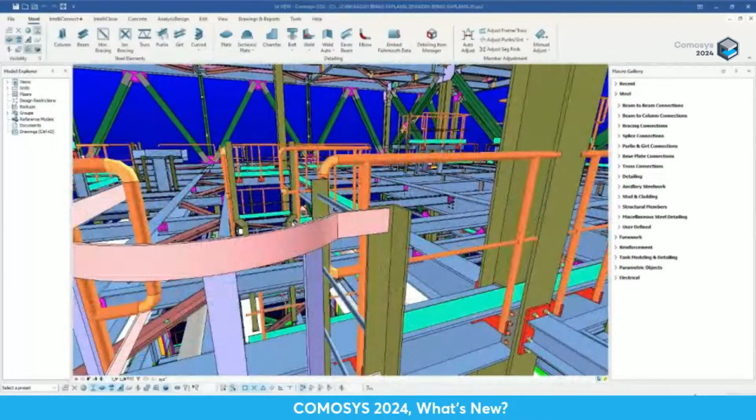All countries are different, design preferences within countries are different—in short, almost everyone does things their own unique way. In this regard, we have initiated a major push towards complete customizability. Comosys, as you know, is already very customizable, but we want to take it to its logical end. In this webinar, I'll show you many new features in this regard, and of course there'll be many other features as well. We have improvements all over.

We have improvements on the steel modeling side, improvements on the concrete modeling side, and we also have the seeds of precast concrete to share with you. There are many improvements on the drawing side as well, and then there are some general improvements. All in all, this is a major release, and we're sure you'll enjoy today's presentation. Now, without further ado, I'd like to start the presentation.

Now, the first thing I want to talk about is what we call user-defined attributes. You see them under the Edit menu—on the right-hand side there's a little button called UDA, which stands for User-Defined Attributes. I'll explain what they are.

Imagine any object—a frame, a profile, a plate, a bolt, basically anything. Out of the box, off the shelf, when you buy Comosys there are many attributes. When you double-click on a profile, for example, it has many attributes built in—the profile name, the material, the profile type, or other things like detailing-related or numbering-related information, or design-related information. All these are obviously off-the-shelf attributes given with the program.

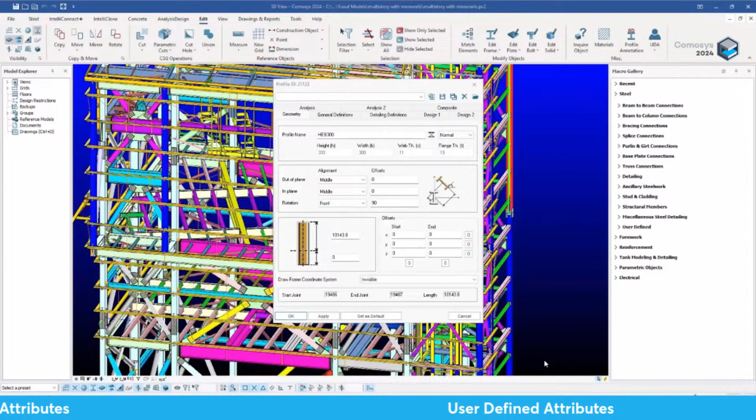Let's press this button over here. Like I said, it's under the edit menu. And when I press this button, this dialog box opens up. I want to go through this dialog box slowly so you can understand how UDAs are used.

Now the first thing I want to talk about is the different types of attributes you might need—this is the type variable. If I open it, you see it can be a text or a text list, an integer or an integer list, a numeric value or a numeric value list, or a Boolean, which means a true-false type of attribute.

Now what does it mean? A text basically means maybe it's somebody's name, or the name of a company or vendor. Whenever you're going to write it down using text, that's a text field. So the type of the attribute is a text type.

But it could also be a text list, which means you want to limit the input to only particular texts. Let's say you have 5 vendors working on the project with specific names—company ABC, company DEF, and so on. You don't want to leave those names open, because with many users working on the model, each might make spelling mistakes or enter the name differently in different places. So you want to limit their choices to only select from a list of 5 given companies—in that case it will be a text list rather than an open text field.

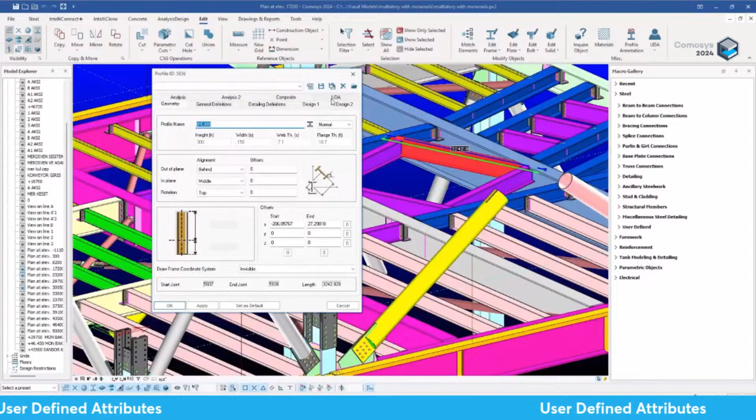But now you'll see this tab called the UDA tab, which means there are user-defined attributes related to this object. When I go inside, I see there's only one caption called finish—we could have multiple depending on how many group types we define. Here we've only defined one caption, finish, and under that caption only one variable called surface finish.

We could have multiple variables under the finish caption—10 different variables in whatever order we wanted. Inside surface finish, we've given it the option of either normal paint or fire resistant paint. So I could choose fire resistant paint for this one and say OK.

Now let's select this one, and this one, and this one—the remaining three—and give these the fire resistant paint option as well. On this floor, in this building, the others have nothing. If I double click on any other one, it has the ability to assign a surface finish, which wasn't available off the shelf, but nothing has been assigned.

Whereas this particular beam, if we go inside, says we need fire resistant paint. Now, just to show you this isn't limited to one UDA, I've quickly assigned several. I've assigned two UDAs under the finish caption—one was the surface finish like we did together, and I've added another called sandblasting type. I've also defined a new group caption called erection contractor, with a contractor's name UDA, just to show you what this looks like.

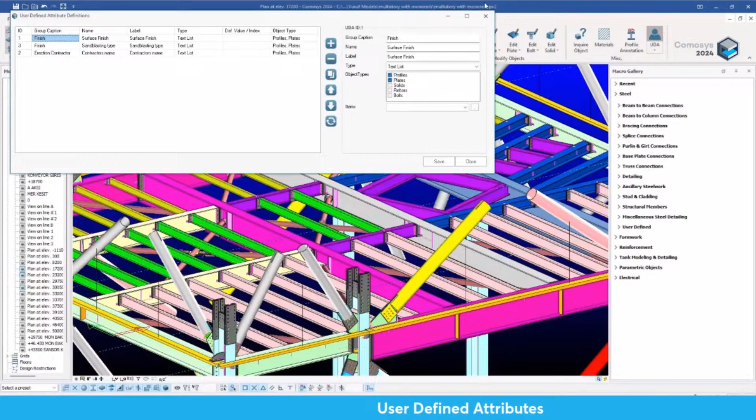If I double click on this beam now, you'll see we have two tabs: one is the erection contractor tab, which wasn't there before because I hadn't added it, and the finish tab, which now has two user-defined attributes under it.

Like I said, you can have as many as you want. You can have 10 different variables, 10 different tabs towards the side, as many as your project basically requires. And you can then use them in different parts of the software.

Now, obviously, you can tell that these user-defined attributes are extremely important. They give you a lot of customizability and flexibility with your project. It gives you the ability to really deal with large-scale projects with very varied amounts or types of data, and I've shown you how you can create as many user-defined attributes as you want.

And now, obviously, once we've created them, defined them, and assigned them to the variable, to the different objects, you can assign them to your profiles, your plates, your generic solids, your bolts, or basically any object type which you have.

And once you've assigned them, you want to obviously use these user-defined attributes. There are three main areas where you will use them. The first one, and the most obvious one, is that you use them for normal model side or drawing side filtering. Filtering is extremely important with large projects.

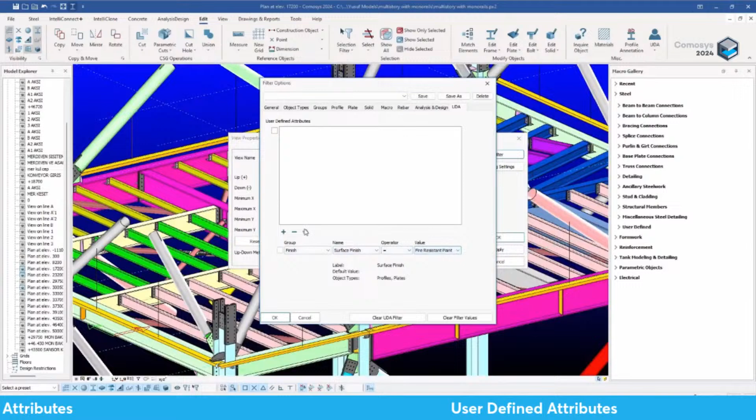Once I've created this filter, let me press this plus button, and I can add it to the top. Whatever I add to the top, those will be the filters which I can then use for my filtering.

Let me create another one, using the erection contractor, the other one I created which I didn't show you, but I've assigned it to certain beams—the contractor's name responsible for the erection of certain beams on the site. We can say equal, and let's call it Steel Smart.

There are three contractors working on the erection of this building, and I've selected certain beams and assigned them to this particular contractor. Let me assign that as well.

Now I've got two filters up there, but I don't want to use both. I just want to see—if I select this one, it means I want to see which ones have the fire resisting paint. If I don't select it, it's not in play; only the selected one is in play. When I press OK and OK, immediately only the beams which have fire resistant paint are left on the screen.

Similarly, if I go back and change this from this to this, now I have the other one in play, and I see these are the beams which will be erected by the contractor called Steel Smart. So this is a very handy and the most obvious way of using the user-defined attributes.

Like I said, there are two other places where we can use them, and I'll just mention them at this point because I'll be talking about them in detail when we get to those topics. The first one is in custom tables.

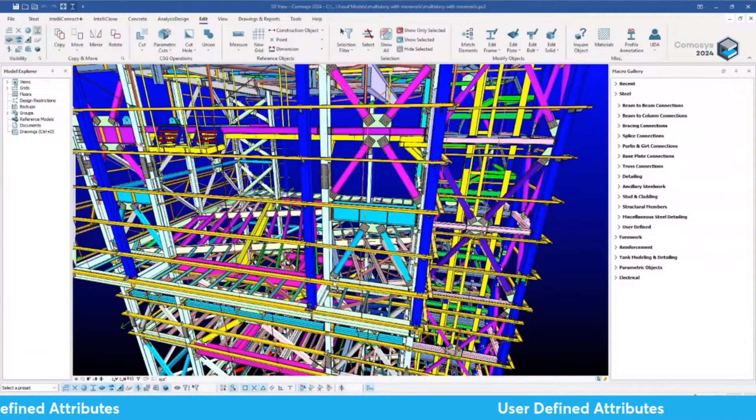And if you do that, then any new model which you create will automatically have these user-defined attributes. So you won't need to redefine them every time you create a new model. So any user-defined attributes which you feel that you will be using again and again in all your projects, you can simply store them away in the company settings folder.

Otherwise, if they're not going to be used every time, then what you can do is you can store them away in the model folder, in which case only that particular model will have it. And if you have these XML files in both the company folder as well as the model folder, then Comosys will just merge those XML files together and take the user-defined attributes from both files, giving you a consolidated set which can then be used in that particular model.

But with this version, what we have implemented is something we call reference models. And reference models can make your work a lot easier in certain ways. What they can do is they can provide you with certain capabilities, which I will talk about. Now, before we start into all that, I would just like to say...

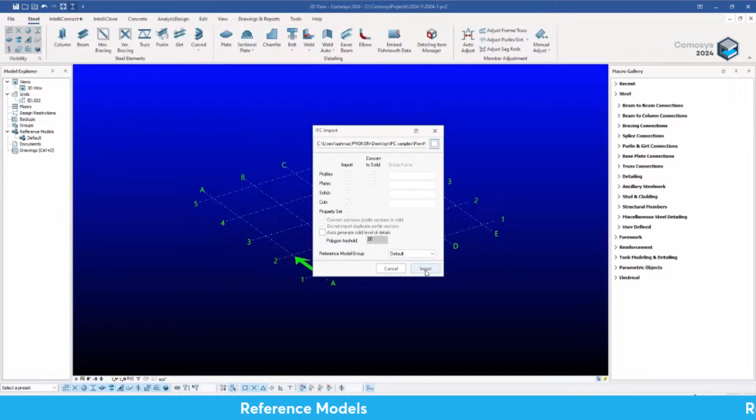Let me click on these three dots and go to wherever we have the IFC file. Let's say we have an IFC file we want to import as a reference model this time. We click on it, say open, and we can change the settings. I'm not going to go into those details since that's not the purpose of this presentation. I just say import, and it starts importing that particular IFC file as a reference model.

Now you may be thinking, what's the difference between importing it as a normal IFC file and importing it as a reference model? There are a few differences which make working with reference models a lot easier in certain ways. To begin with, if it was a normal IFC import, I could have deleted any object.

But in this case, if I select this object and press delete, it's not going to delete it, because it's either one, all, or nothing. The entire reference model needs to be acted upon by the user, and only things you want to do with the entire model are possible.

So what are those things which are possible? If I open this now, you see we have this reference model listed under the default group. If I double click on that, you see it's an IFC file. It tells you where the IFC file resides, under which group (the default group), and it has a name. You can add some descriptions, stages, and sources, some extra information if you want.

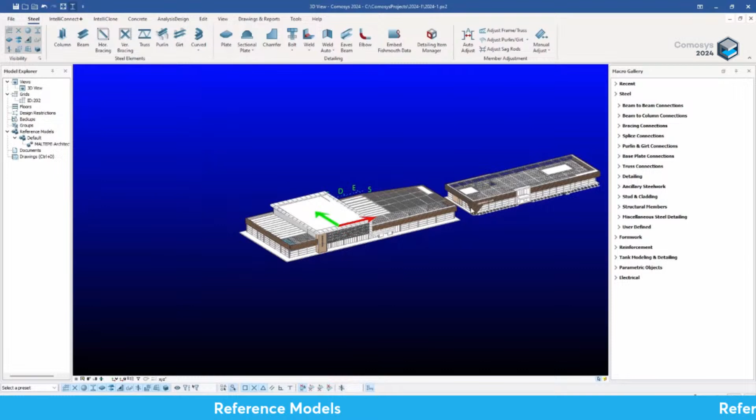What's important is that you can give it an offset. For example, if I give it an offset of 30,000 in the X direction, the entire IFC file gets shifted by 30,000 in the X direction. That isn't possible after importing from a normal IFC, because that's a one-time import, and once it's imported, it's done. But here, as you can see, you can give an offset to the origin.

What you can also do is give a scale factor. For example, if you imported by mistake using the wrong units — it was supposed to be millimeters but you imported it in centimeters — you can now change the scale as well as the rotation, even after importing. It also gives you information on when the file was last imported, so if the IFC file changes in the folder where it resides, you can re-import it from there.

Now you have something called custom draw type and custom color. By default it uses the system default, but you can convert it into wireframe if you want, in which case this particular model will always be drawn in wireframe, no matter what the rest of Comosys's drawing settings are. As you can see, everything there is now drawn in wireframe.

What else can we do? We can change that to anything, like I said. You can also change the custom color, meaning you tell the system to override the color the IFC file provided and turn it into something else — gray, for example, if it was a reference structure nearby your structure. That's something you'd be able to do.

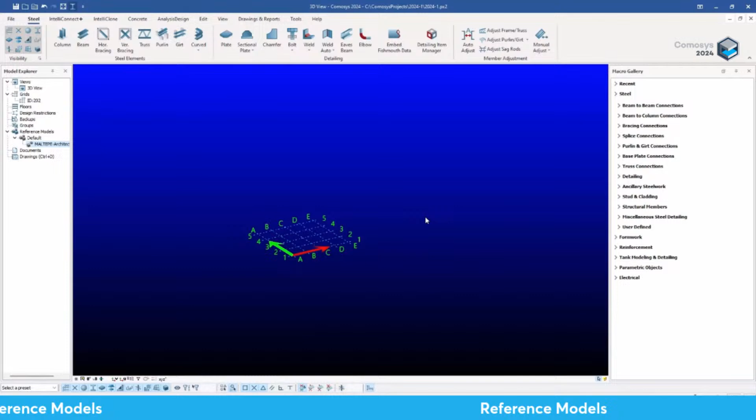Had it been a normal IFC import, you would then need to continuously manage it by selection and all that. But in this case, you can just right click again and say show, and the group and the entire reference model is shown on the screen once more. So this is the basic advantage which we have.

Once we have the entire reference model automatically saved under a group, we can show it, hide it, or even update it if the source file changes, and bring it back in. We can delete it, remove it from our list of models, and re-import it later. As long as we don't delete it, we can have as many models as we want under the reference model tab, and manage those models by right clicking them to show, hide, or update them as needed.

Not in this version, but very soon we will be having change management implemented into this as well, which means that when you update a model, when the source file changes, it will show you which particular objects have changed from the last import, which ones were added, which ones are deleted, which ones have been modified, etc. So the entire change management system which exists in Comosys will be implemented to this particular feature as well.

It's impossible to show deleted items, because if you delete them, there's nothing left to see. So it will temporarily show you those items, indicating that these items have been deleted since the last import. In the previous import they existed, but not in this one. But it'll also give you the option of deleting them once you've seen them.

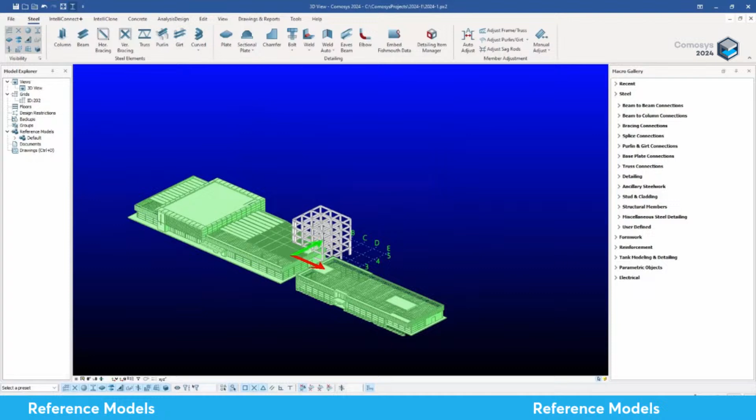It's wherever it is in the current units. If we go and double click over here, we now see that we have two models over there, the earlier one and this new one. We can double click on this one. We can give it a Y offset of 10 meters if we want, for example, maybe the origin has not been brought in properly. What we can also do, like I mentioned, is give it a rotation of, say, 35 degrees.

And in this way we can continue importing in our reference models, and we will keep collecting them on the left hand side. You can have 10, 12 different models.

Now obviously when you have these reference models, then you can work with them. They're all snappable points. So for example, if I were to enter a beam, I can snap from this point to this point, and my beam will be created. I can snap from that point to that point, and my beam will be created. So these reference models can now be used to create real native Comosys objects, and then we can work with them.

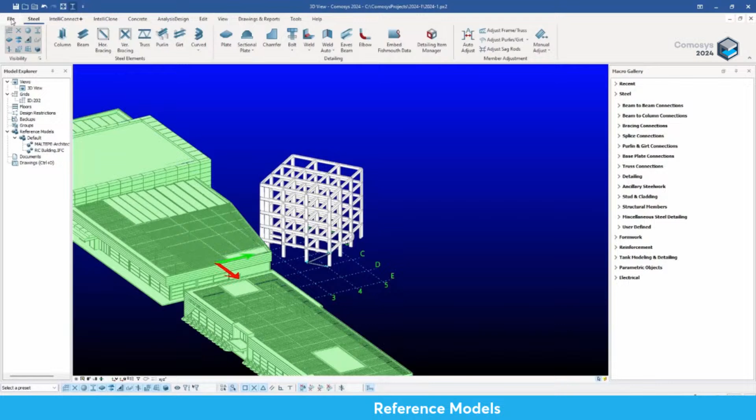But the whole idea is that if we had imported them through the normal IFC import, not only would they have automatically been converted to local native objects, which we might not have wanted, but also each one of those objects would need to be handled separately, because they wouldn't behave as a group. Whereas now, in this case, we can just turn this one off, leave this one on, or turn this one back on and turn the other one off. So it makes the whole business of dealing or working with reference models a lot easier than the normal IFC import would have done. So we hope you like this feature.

It's very useful. What we can also do is, as I had mentioned at the beginning, we can also import DXF models. Obviously, that's not going to be used a lot, but you can do that. And the one advantage you will have over there is that if you import a DXF model, then any layers you have in the original DXF file will be available for showing and hiding once they have been imported inside Comosys.

One small thing I want to mention is the improvements in the filters. Previously, some filters related to plates were not part of the filter option, but that capability was accessed from other parts of Comosys.

But now we have included under the standard filter the ability to filter according to the material of the plate, according to part and assembly position numbers, prefixes, actual numbers, etc., and also the ability to filter according to the thicknesses of plates. These were not part of the standard filter previously, so they couldn't be used in drawings, or it was difficult to use them even on the modeling side. But now we have them. For example, this building is mostly 355, S355, the plate material.

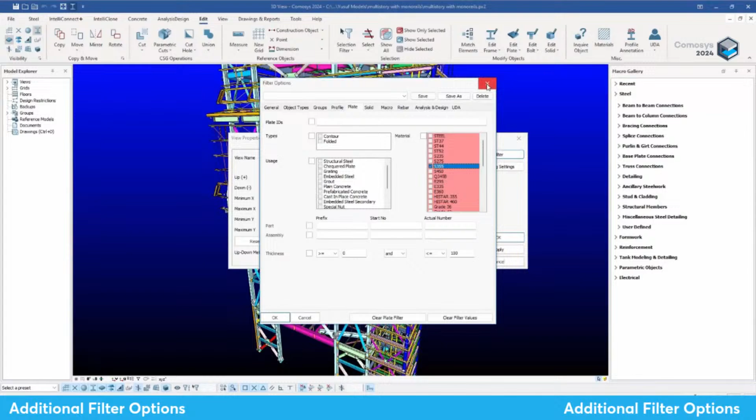Let me remove all the profiles, so now we're only seeing the plates. And let me go into the filter and select the 355 plates. If I just select that and say OK.

This building mostly uses this material, but if I want to see if I missed any, I can use the 'not' option, which means show me any plates which are not 355. If I do that, certain plates come up, and I can double click on them and see that the material has been set to some other material by mistake, and I can either make the necessary changes or leave it.

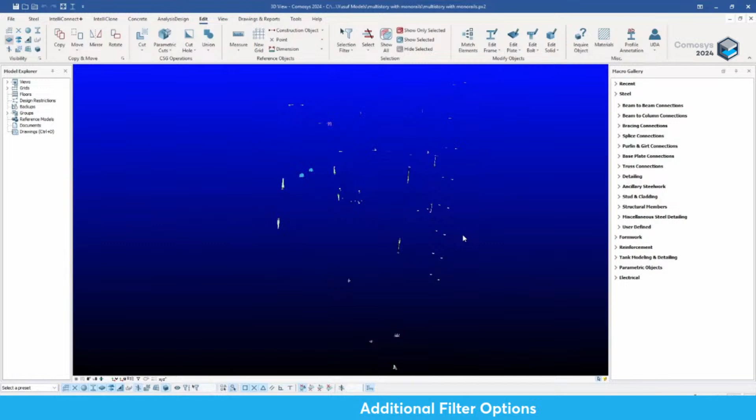Similarly, you can also filter under the plates section. Let me remove this filter, and now I want to show you this thickness related filter. You can filter according to the thicknesses, so you can say show me the plates which have a thickness greater than 5 millimeters, and you can put an 'and' or 'or' between them, and less than or equal to 10, for example. So you have these operators, equal to, not equal to, less than, and you can use all of them in combination with the first and second parameter.

So now it's going to show me only the plates which are between 5 and 10 in thickness, in millimeters. If I say OK, it filters out those plates, and I can zoom in and double click on any plate and see that the thickness is actually, for example, 10 in this case. This one is 10 as well. Maybe this one is 10 as well.

But if I go into the filter and change it to 'not', which means show me the plates other than these, either less than 5 or greater than 10, then I get these other plates. For example, this one is 20 millimeters. So this is a very quick way of using the filter command, where previously we didn't have these options of filtering the plates in this way, and I think they're very useful for somebody who's modeling.

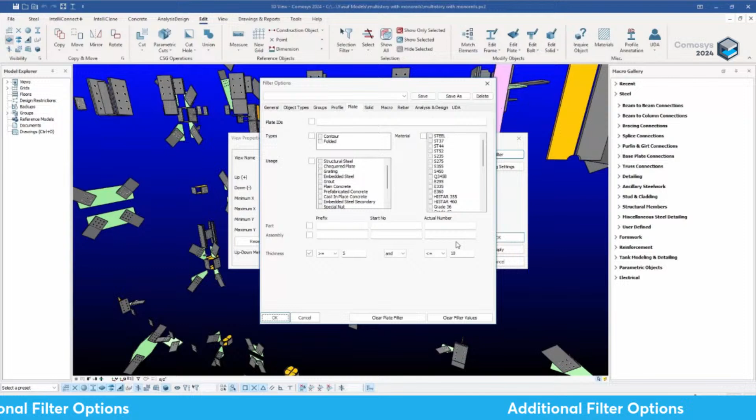Next, I want to talk about the on-screen editing handles. As you know, Comosys has very powerful features for modeling, and one of them is on-screen editing. Up till this version, we had on-screen editing mainly for the plate object and the rebar object, and they were both very advanced. You could pick the handles, give chamfers, move them, delete the chamfers, move them to a surface. There are very nice examples of how these are extremely useful.

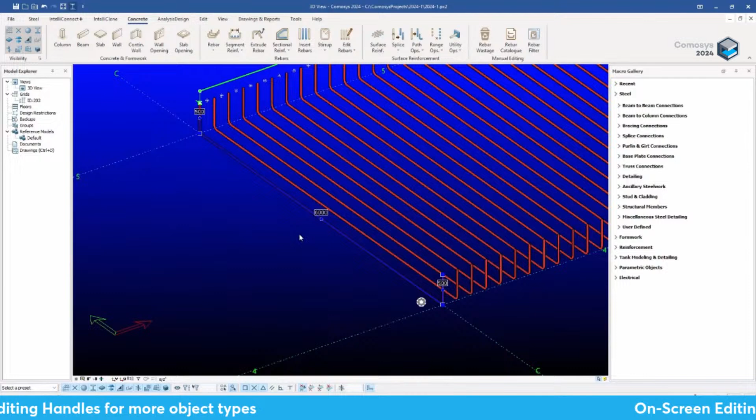Similarly, for the rebar, you could move the range, limit the range, make it from linear to trapezoidal to circular. You could insert points in between, move the points of the rebar definition, etc. These are very useful as on-screen editing handles. But what we didn't have was, for example, for frames. So in this version, we have introduced on-screen editing handles for profiles as well, so just like for the other objects, we would just select the object and the on-screen editing handles would appear.

Similarly, in this one as well, when we select the frame object, it immediately shows you the length of the object on the screen. Secondly, it gives you two handles, one at the start and one at the end. You can just select that handle, and when you do that, you can give it a direct move. So I can just say move it 500, for example, something like this.

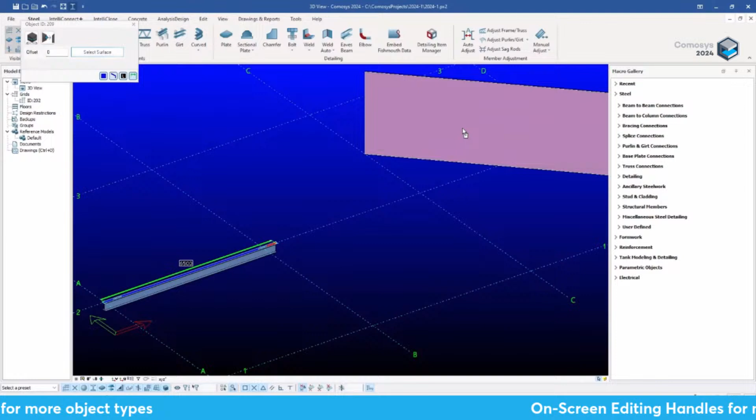Or, for instance, I could once again select the handle over there. Instead of giving it a normal move where I have to enter coordinates or distances, I can say move the definition point to a surface. Press this button, and I can even give it an offset. Let's keep it 0 at the moment, but it's asking me to select a surface. When I do that, I can select a surface on the screen, and then this point is taken perpendicular to that surface, basically a perpendicular extension of that point to the surface.

You can always turn these handles on and off if you don't want to see them. For example, right now, if I select any object, the handles are turned on. But if I click on this button over here and toggle it, the handles are not shown. So if you don't want to see them all the time and only want to see them when you're using them, you can turn them off, and if you turn them on, they will appear on the screen.

Another object which previously did not have on-screen editing handles is the folded plate. Previously, if we needed to modify or give chamfers to the folded plate, we needed to double-click on the object, go to the chamfer tab, and remember which point. For example, when creating this plate, if this was the first point, the second, the third, and the fourth, we needed to remember that to give a chamfer to this one, it's the second point. So we would need to enter 2, meaning the second point, and then give the chamfer parameters, something like this, and then we would get our desired chamfer.

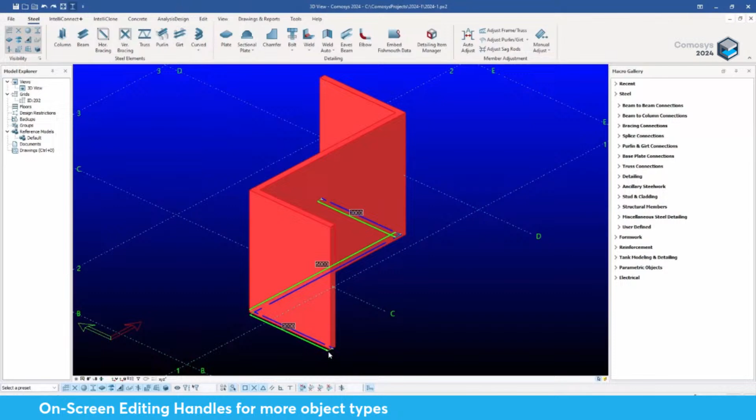Now, in this version, we have given direct on-screen editing, so you see the handles appear now, which previously did not. You can just go and select that chamfer for the second point and say I want to give this a chamfer, this type, and just give those parameters. So you don't need to remember which point was which, which previously made it a bit difficult. You can just go like that. Similarly, you can select the other chamfer, enter that, and give it another chamfer variable, for example. It's much easier like this on the screen.

Let's just undo that. Similarly, you can select those chamfer points and move them directly, in the X direction, the Y direction, or the Z direction. Or if you wanted to, you could select a surface on the screen for those points, just like I showed you for the frame element as well. This is a very useful feature where you can extend that point to another surface, which you can select on the screen.

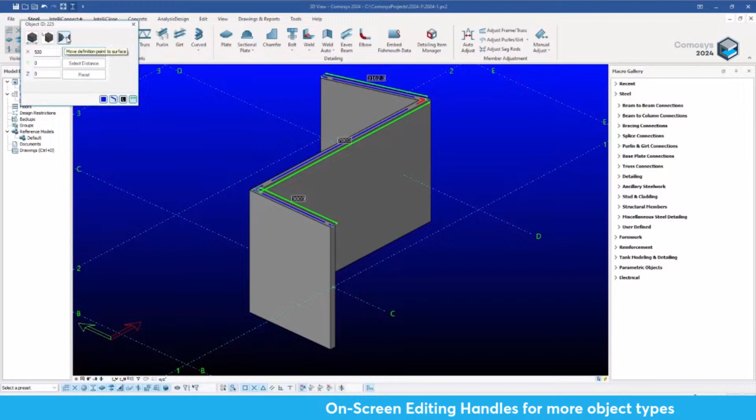Now, similar to the frame and the folded plate which we just talked about, some of the parametric cut objects, which are very useful in modeling, have also been given handles or on-screen editing capabilities. For example, the box cut has been given this capability in addition to the tapered cut as well. These can be very useful if you want to create a parametric cut and then later move it around using the handle.

So, for instance, let's use the box cut. It asks for a surface. Let me select the top surface of this beam. Then it asks for an origin point, so let me give it this one and just right click. I just want to create a simple cut so you can see it on the screen, and I'll get out of the command.

Now that I've created it, as you can see, this cut itself has got certain handles on the screen. So, for example, if I select this one, I can move it around by saying I want to give it an extension of about 50, and it's going to move it in that direction, 50 millimeters, the length like that.

Similarly, this direction also can be modified using these handles which I've just shown you.

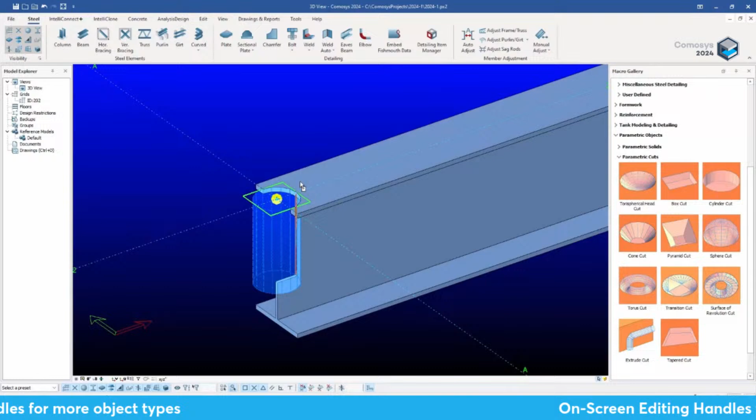Similarly, if I was to use the cylindrical cut as a parametric cut, I can once again show the top surface and then show a point and just create a default cylindrical cut. And then if I select the cut itself, you can see I have these handles for adjusting the length and the radius of the cut.

For example, if I choose this handle, I can modify the radius of the cut by moving it 50 millimeters in that direction. Similarly, I could choose this handle and increase the length of the cylindrical cut. So it's very easy to use these parametric cuts and then use the handles for on-screen editing.

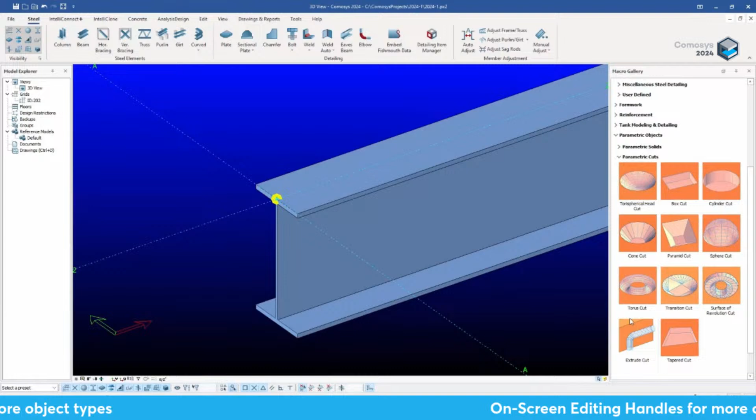Another very important parametric cut, which can be used for on-screen editing, is the tapered cut. Let me try and use that. So let me select this side, the side of the flange, and then I can create that cut over here.

If I use this point, I give it a DX of 500. That's quite far, but anyway. Then I can stick at this point and say something else, at 500, comma 0, comma minus 200 or something like that. And then I can stick at this point and say DZ minus 200.

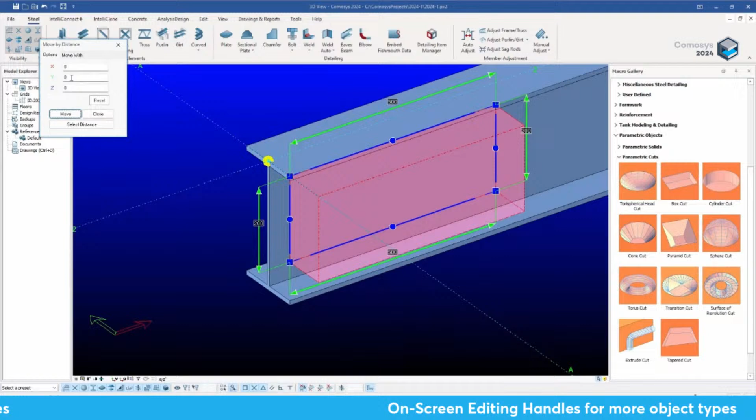So this feature is very useful. I can now select the last point again, and it asks about creating holes inside this cut, which I don't want, so I'll just right click, and it creates that cut immediately over here. Obviously it's not penetrating the object at the moment, so I need to move it a bit. I can move it linearly in the Y direction, say 100 millimeters, and now it's cutting the object.

But it's like a polygon cut - you can use as many points as you want. The definition points which I use to create this polygon cut are available as handles, and I can even insert new points in this cut, just like you can insert new points in plates.

So if I select this point, for example, I can give it a chamfer of this type with a radius of, say, 20, and say apply. Immediately I get a little chamfer over there. So just like I showed you, by selecting this tapered cut, you could give chamfers to points.

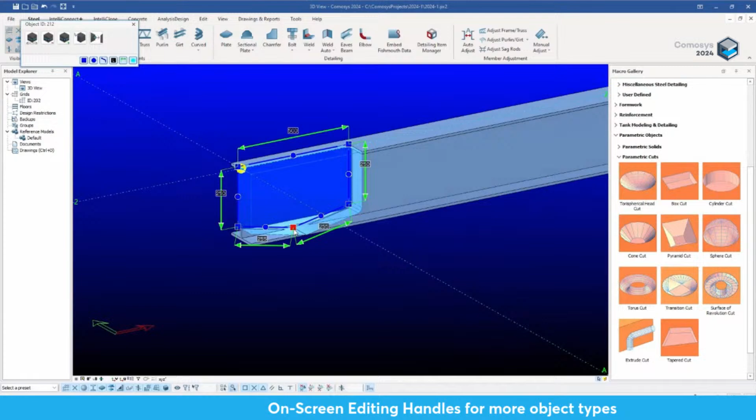You could also move the entire definition lines. So I can take this entire line, for example, and move it downwards by 50 millimeters. Or I could select this point only - this point doesn't exist, it's the midpoint - and I can create a new definition point by adding a new vertex to this cut. Imagine I've modified the whole definition of the cut on screen, and let me move that a bit more. Now it's a new point, so it's a lot easier.

I can do that, and if I remove the cuts from the screen, you can see how I have cut my object. This is extremely useful because after creating the cut through the tapered cut command, you still have the definition points and the handles on the screen. You can give chamfers to the corners, insert new points in the cut, and move entire lines.

So this line, for example, if you wanted to move it to the right, all you needed to do was reset this and say move it 100 in the X direction, and it will go 100 in the X direction. So this is very useful. This on-screen editing for cuts, the availability of on-screen editing for cuts as well, will really make the job of the detailer a lot easier, we believe.

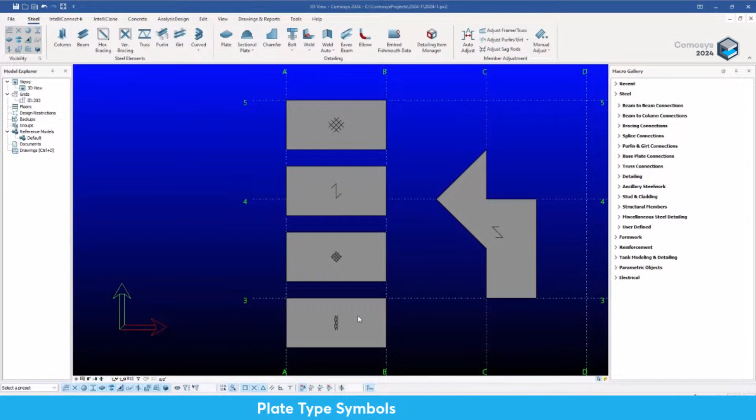Now let's talk about gratings and checkered plates. Previously in Comosys, we could model gratings and checkered plates, but there was no way of distinguishing between them easily visually on the modeling side. On the drawing side, we would have these symbols to represent them, and from these symbols we could tell. But on the modeling side, we did not have these symbols, so it was difficult to tell what we had modeled unless we double-clicked and checked the usage.

But in this new version, what we have done is we have created this ability to create these symbols. So for example, this is a checkered plate. And now we have the ability, the moment we select the checkered plate, it automatically draws the symbol of the checkered plate on the model.

Now, what it can also do is you can decide whether you want to see that symbol or not. So if you remove this tick, then the symbol also disappears. But if you put it back, then like I said, you have the option of seeing it.

Now, another option which you have is you can give certain offsets. So for example, if I were to give an X offset of 1500 millimeters, I can shift that symbol a bit to the left or the right or the top in whichever X or Y direction I want. The reason why we do so, it's not that important on the modeling side, but wherever we place this symbol on the modeling side, it's going to appear at the same spot in the drawings as well. So the user now has much more control over how the symbol will appear and where it will appear.

So let me bring that back, or we can even give it a rotation if you want. Let me bring it back to the original one. This is the grating symbol, as you know, and this has also been now provided for the modeling side as well. Once again, we have whether we want to draw the symbol or not, but we can also choose whether we want to place it in the short direction or in the long direction. So if we want on the modeling side, we can show the direction in which the grating will be designed. So the user now has more control over this grating symbol, which can then pass on this information to the fabricator as well.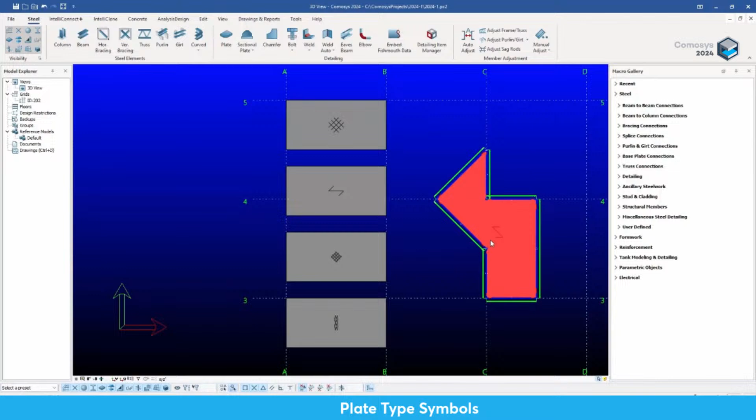And not only that, as you can see over here, sometimes we have a very weird piece of grating and we want a particular direction. So then we can use the rotation angle to exactly define what the direction of the spanning beams of the grating would be.

Similarly, we have these two new options. We did not have them at all. This is the diamond plate in the usage - it's all being done from the usage, by the way. The diamond plate option has been added, this wasn't there previously. And when we choose that, then we get this symbol by default. And similarly, this fourth one has been added, which is for expanded metals, expanded sheet - this one gives us this particular symbol. Now, these symbols are the most commonly used symbols globally.

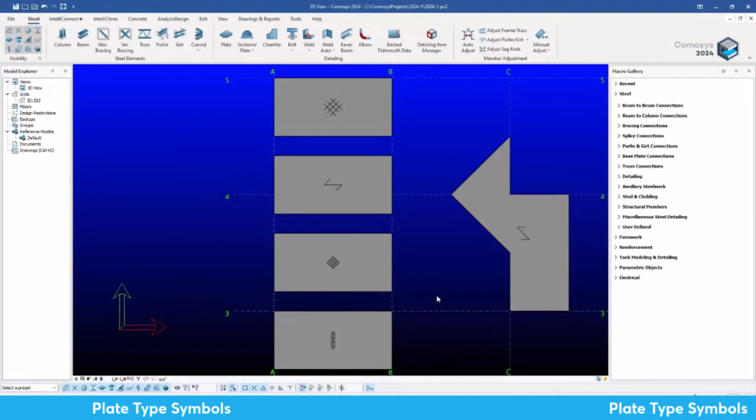But if you want, you can customize them. We will be talking about something called the symbol editor in this webinar later on, and in the symbol editor, we will show you how you can actually create your own symbols. And if you do that, then you can actually link those symbols to these plates as well.

And how you do that, I won't be showing that at the moment, but you basically go to project preferences. And if you go to the symbols over here, it shows that for the checkered plate and for the grating and for expanded plate and for the diamond plates, you can assign 4 different symbols from a particular symbols file. I mean, we haven't talked about this, so I don't expect you to understand how the details work. But basically, you will create your own 4 symbols, you can assign those indices, and then whatever symbols you use in your country, those symbols will appear on the modeling side.

And of course, the same is true for the drawing side as well. When you decide on these symbols, when they go to the drawings, then on the drawings also you will get to see the same symbol. So this is a very important improvement which was lacking in Comosys - this ability to customize all these symbols for grating and checkered plate and adding your own symbols, etc. And this is something which we have added to the new version.

Now, the next thing I want to talk about is once again related to what I said in the beginning, that we are pushing for better features when it comes to customizability. One of such features is the ability to create arbitrary symbols of any sort, like the ones you see on the screen right now, and then use these symbols anywhere in the drawings, either directly or as part of some text, or even as part of customizable annotations.

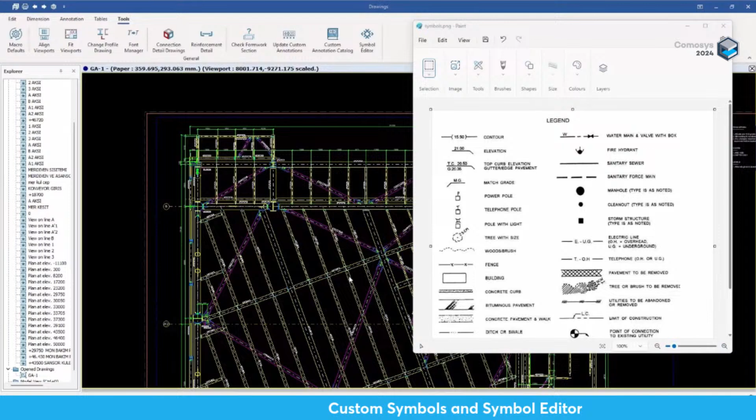So what we have come up with is what we call the symbol editor, which allows you to create your own company symbols, as many as you want, in as many groups as you want, and then use these symbols once again in your drawings. So now I'm going to show you the tool that we have developed in this regard.

Now, if you come to the drawing side of Comosys, not the modeling side, but the drawing side, where we have all the commands for creating drawings, under the Tools menu on the right, we have something new, which we did not have before. It's called the Symbol Editor.

And if you were to click on this, a standalone application opens up. And I'm emphasizing that this is a standalone application which you can use from within Comosys, or you can distribute it and people can create their own symbols and send them back to you. It's a standalone exe, which can be used separately from Comosys as well.

Now, what happens over here is that when you open it, it gives you a clean file with one empty symbol inside it. On the left-hand side, you will see the symbols appearing like this. So for example, there's only one at the moment, and I can start drawing inside this boundary area provided.

And I've got lots of commands at the top. If you see, I can create a line. For example, I can just go from here to here, and I can create a line. I can create a circular arc, elliptical arc. If I want, I can create a rectangle.

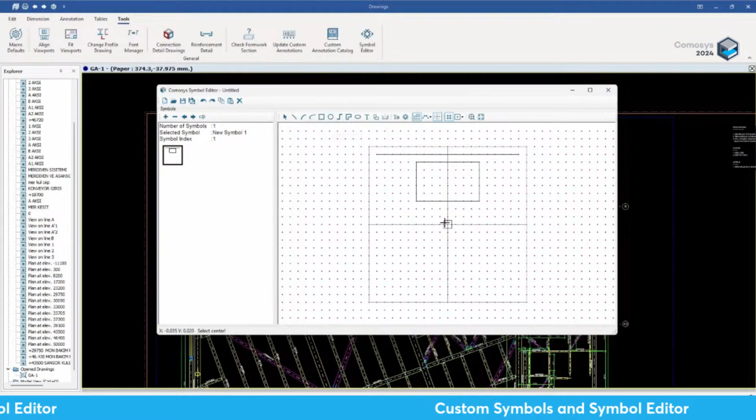So for example, I can do something like this. I can create a circle if I want. I can go like that, and these are basically snappable points you're seeing, and you can modify the grid spacing. You can make them more dense and more precise if you want.

You can create continuous lines. So, for example, I could start from here like that. Basically, it allows me to do what I want, and I can right-click to finish the command. Then it allows me to draw polygons, ellipses.

It even allows me to write text. So I can just click over there and write a little text over there if I want. And then it allows me to rotate these symbols.

So I can select these symbols. I can choose the select command. I can select this rectangle, for example, and I can double click on it. And I have got access to, I can make its line thickness maybe more than the other ones. I can change that number to something which I want. I can change the color.

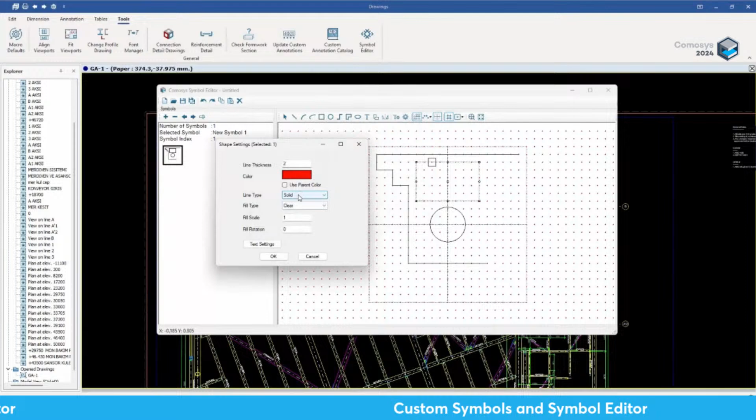For example, I can give it a different color. I can change the line type from solid to dash to dot, dash, dash, dot, whatever. I can, if it's a closed shape, then I can decide whether it is filled or not.

So let's choose one like that. Let's take the circle, for example, and see that the fill type is solid. And in that case, we get a solidly filled circle. And we can basically go around creating arcs and lines and polylines and circles and rectangles, giving them line thicknesses and all. As you can see, it's being recreated on the left-hand side.

Once we are done with finalizing this symbol, we can add another symbol to this file. This is basically showing you one file, and any file can have as many symbols as you want. Once you're okay with it, you can say add, and it gives you another empty symbol, and you can say add and it'll give you another. And you can keep drawing inside. The one you select is the one you're going to modify on the screen.

And using these commands over here, you will be able to, let's see, you can fit it into the frame, you can zoom in. There are some snap options. You can show the grid or not show the grid. There are settings for the text.

So if I press that, you can select the text font, the font size, font style, the font itself, etc. Similarly, there are general settings regarding the line thicknesses for the next object that you're going to create. But it has a lot of flexibility.

Once you're okay with all of that, you can just press this save button, and this will save the file as a symbol file, which you can save away anywhere you want—in the company directory, company folder, or in the model folder, with some details I won't get into. You can distribute these files to other people in the company, and you can make multiple files of this sort as well. So it's a very handy feature.

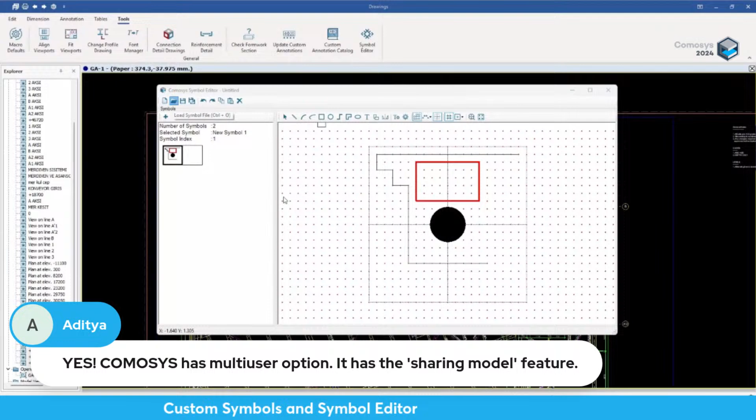Once you are done with this, like I said, it's almost impossible to provide all the symbols you might need. So for example, let me just load a symbol file from here. Let's go into another directory, program files—sorry, that would be program data, Proya software, Comosys 2024 preferences. This is where the company files will be stored, and if you come down, there's a symbols directory.

Inside there are many files already there. So for example, if I were to double click on this one, you see that it already has many different symbols created inside it, which you can use depending on your requirements, any way you want in the project.

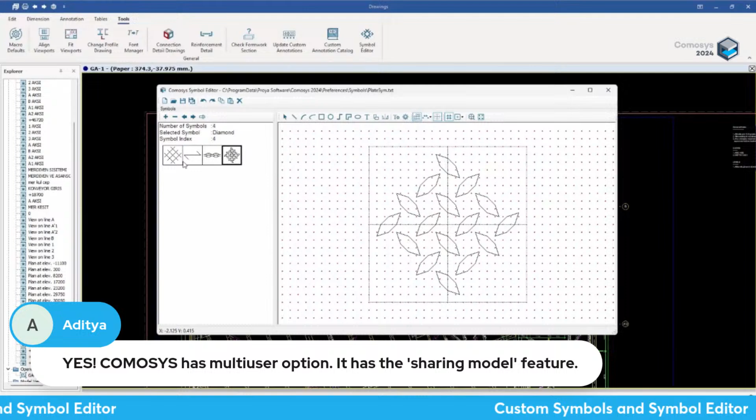Let's go back—there's another one called miscellaneous symbols. So you can have your rail symbols, your cladding symbols, maybe your north symbol, some pipe related symbol. You can group them and create as many as you want. Plate symbols are for things like checkered plate, grating, or expanded sheet metal symbols, etc. So you get the idea.

So these are profile symbols, these are filled profile symbols. The idea being that you can create as many files as you want, store them away, and then use them in the drawings exactly the way you want.

Now, obviously, the next question coming to your mind would be: how do I use these symbols? As I said earlier, there are three ways. The first and most obvious one is you can directly insert these symbols anywhere you want on your drawings, just by clicking on a point, and that symbol will be inserted there.

The second usage is that you can make them part of a text. You can have a text around it—it could be a multi-line text or a single line text. You can put it inside somewhere in the middle of the text.

The third usage is that you could use them as part of custom annotations as well. So you could have a very complicated annotation in which you write certain fields, then insert a symbol, and then continue writing something. It could be a complicated annotation, but you can use these symbols inside annotations too.

I'm going to show you at the moment how to create these symbols directly on the drawings and also as parts of text. But when it comes to using them as part of custom annotations, I'll show that when we get to custom annotations.

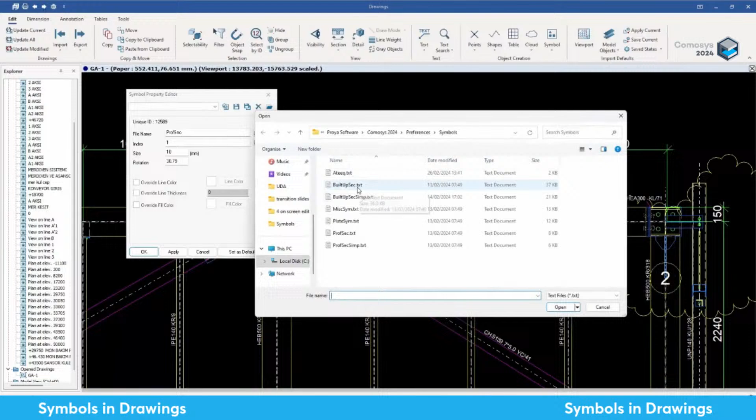So let's go in there, and change it to miscellaneous, and see what we have. Okay, we have this north symbol. We can use that. And when we do that, we see that we have placed this north symbol inside the drawing, aligned in that direction.

Now, once it has been inserted, you can change the size as well. By default, all symbols are created with a size of 10 millimeters on paper, so that will be the default size. But if you want, you can make it bigger like that, and then you can shift it somewhere else.

Or what you could do is change the rotation. In this case, we already gave it a certain direction, so it calculated that degree. I can change it back to 0, and it's going to point directly upwards, and I can give it a different angle, etc. But what I want to show is how easy it is to create these symbols and then use them directly on the drawings. The other way which I mentioned was creating these symbols as parts of text.

So for example, if I were to create a simple horizontal text with a leader, let's just place it like that, and leave it over here. This is an empty text right now. I can double click on that. Let's say I start writing, 'this is the symbol,' and after writing this much text, I want to actually insert the symbol over there.

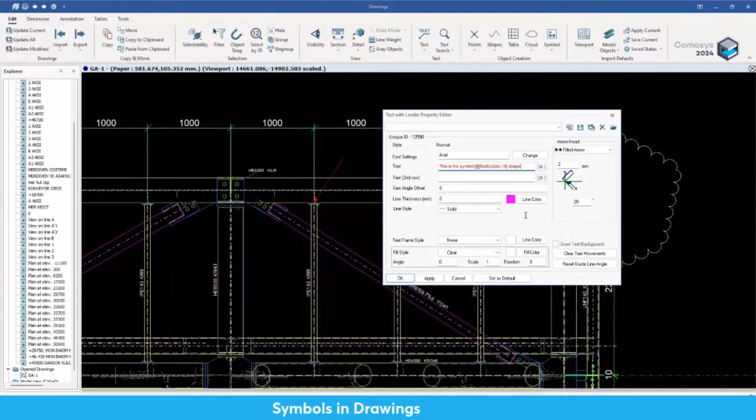And when I do that, you can see on the screen that the symbol has been inserted inside that text. In this case, the size of the symbol will be the same as the font size that you're using in the text. So if you increase the font size, the size of the symbol is going to change according to that.

Basically, any text you create, it could be a vertical text with leader or horizontal text with leader, a multi-line text or a single line text. Any text you create, you can insert these symbols inside, not just once, but multiple times as well, so it's a very useful feature. You can use these symbols directly, as parts of text, and also as parts of complex custom annotations, which we will talk about when we get to that topic.

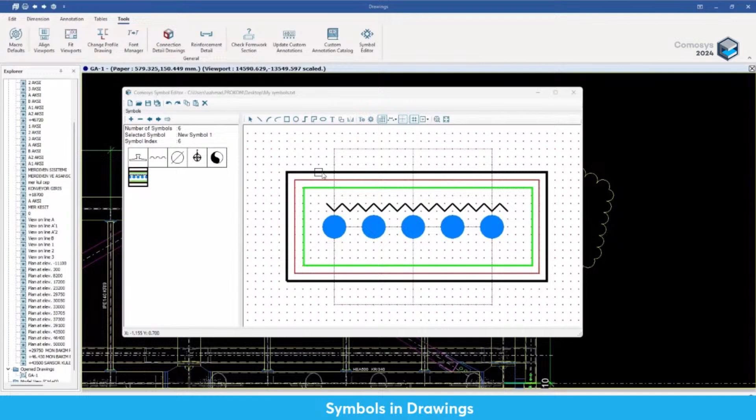One last thing I would like to mention is that, as I said in the beginning, there's a boundary over here inside which you need to create your symbol, but it does not stop you from creating a symbol which goes outside this boundary, as you're seeing on your screen right now. It'll basically just take the whole thing and draw it when you insert it in your file. The central box will only be used for locating the origins of the symbol. So you could have a long rectangle if you wanted, vertical or horizontal, or some other shape. It doesn't necessarily have to stay within the boundaries of the square provided.

So that makes it a bit more useful, because sometimes we have these legends with long rectangles used to show different types of symbols inside them. And even in those cases, you can use the symbol editor to create those symbols.

Now, let's move on to another very important topic, which is custom annotations. As you know, annotations are the heart of all drawings, and all different objects like profiles, plates, bolts, etc., and generic solids are all annotated in Comosys. And that is really the heart of drawing creation, because you create objects and then annotate them with the fields available for those objects.

Now, if you remember, we had annotations before — whatever fields we provide to you off the shelf, and you can add these fields inside and create your annotations. It's pretty versatile. But with this version, we are improving this a lot, and giving you the option of creating your own custom annotations. This really revolutionizes this whole area, because in this version we are focusing on customizability, since everybody does things their own way. So we'll be talking about custom annotations, and I'll be explaining how we do that.

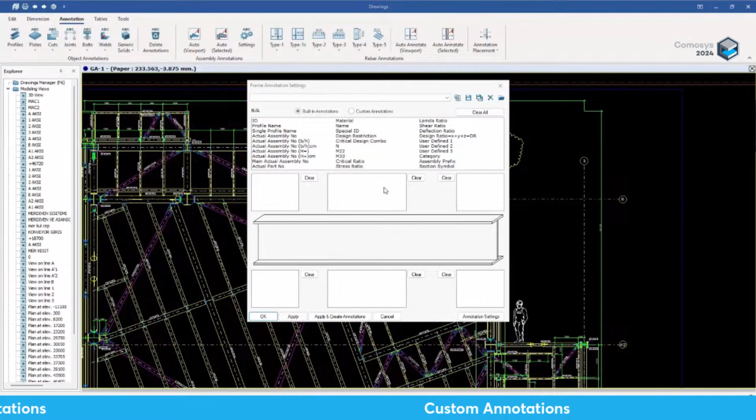Now, to create custom annotations, just like I showed you under the tools menu, we have the symbol editor. We also have now what we call the custom annotation catalog. This is basically the place where you create all your custom annotations for profiles, bolts, solids, plates, rebar, or anything basically. So we'll be talking about this particular command in detail.

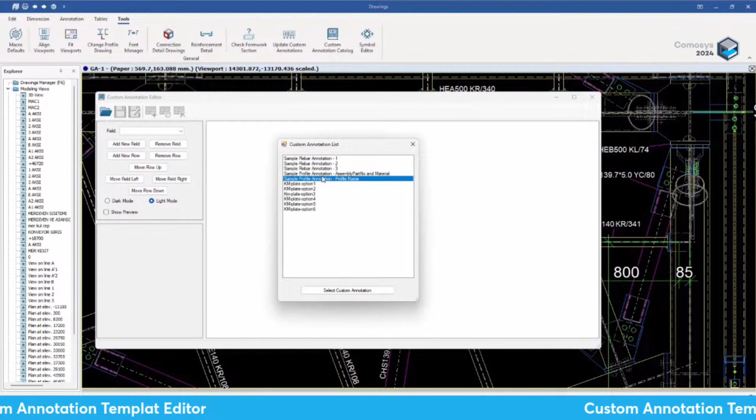What you do is you begin by clicking on this. When you do so, it will open up whatever existing custom annotations you have created up till that point, and it shows you a list of those annotations. This is a sample which comes with the setup: sample rebar annotations, sample profile annotations, a few plate annotations, etc. You can actually look at them and see how they work. It gives you this list in the beginning, so you can choose any one of them and modify them and save them as a new one if you want to.

Now let's begin by creating our own custom annotations. So these are the existing ones, we don't want to do anything with them. Let's just close this. After we've closed this, if we go over here, this little button with the plus sign says create a new custom annotation template. Any new custom annotation you create will be called a custom annotation template.

So you press this button, and when you do that, this little dialog box appears, and here you can give your custom annotation a name. For example, I will give it a name called my profile annotation. You can give it any name you want. This is the name which you will then use later on to recall it to create the annotations. Now I've called it my profile annotation.

It asks for a category. The category can be any one of the object types. Because I'm creating a profile annotation at this point, if I open it, you see I can choose it to be a profile, plate, bolt, weld, rebar, formwork, or solids. Because it's a profile, I just use the profile one. If it's a profile, then the subcategory field is not required — it's required in the case of generic solids.

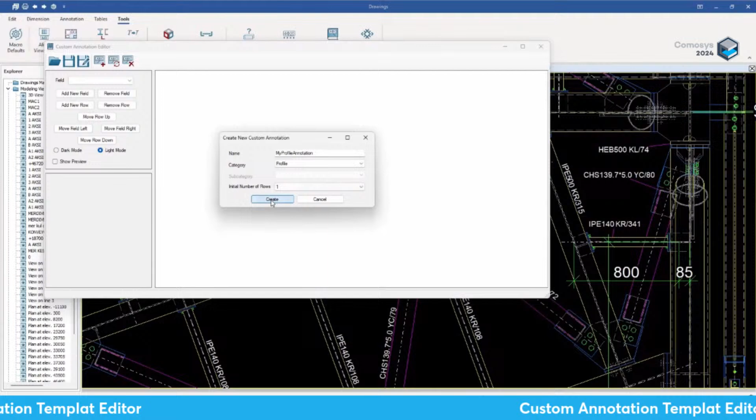It gives me an initial number of rows, which basically tells me that this custom annotation will be one row. Now I can change that later on as well. So I'm okay with that, and I just say create. When I do that, it creates a sample annotation, which I can then modify whichever way I want.

Now, if you see, it has provided us with a sample annotation, and like I said, we can modify it. So let's look at it a bit closely. What we see is that there is the name of the profile over here, so this is a field. What I mean by a field is that this will depend on what profile you're annotating — it will look at the profile and annotate according to that particular profile. And you can select this field.

The moment I select it, on the left-hand side, let me open this up a bit and maximize this so they can see easier. When I click on somewhere over here, these fields disappear because nothing is selected. All it's saying is that this entire annotation is called my profile annotation, it is of the category profile. Let's not worry about the anchor row index at the moment. But the moment I select a field from within this, this whole area changes, and now it's giving me information about this particular field, HEA 300, which is basically the name of the profile. It's saying that this field will automatically take the data intelligently from the profile name field of profile objects.

Now, as it is selected, if you see over here, it says profile name. It gives you the sample text. It also gives me a left padding and a right padding.

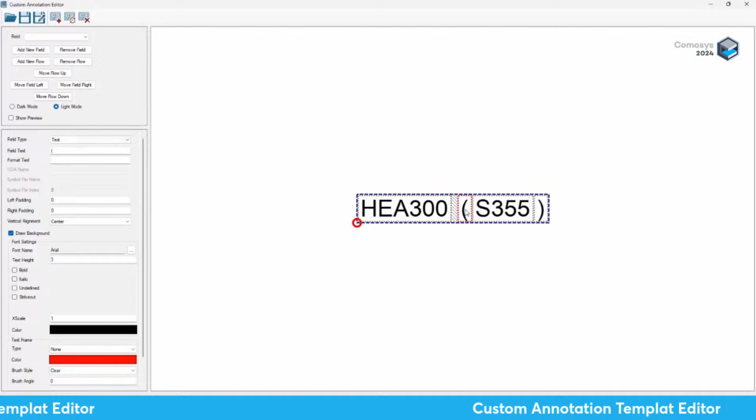This one is just a text, it's telling me. You can add 4 different types of things in a custom annotation. You can add fields, you can add user-defined attributes, which is also new. I mentioned those while I was explaining user-defined attributes, that whatever user-defined attributes you create can then be used as parts of annotations as well.

The third thing which you can put in a custom annotation is just pure hard-coded text. So sometimes, for example, you have brackets or some other things which you want to put, you want to write something down. In that case, you will insert a text.

And then this S355 is another field which says object material over here, if you see on the left. And then there is another text. So this little custom annotation at the moment consists of 4 components: a field, a hard-coded text, another field, and a hard-coded text.

If I want, I can select any one of these components, I'm selecting this field over here. And if I press the right arrow key, I can move it to the right. And if I press the left arrow key, I can move it to the left. So any component, I can select this bracket, for example, and move it to the left, move it to the right, or move it back.

So all these individual components in that line can be moved left or right by using the left or right arrows. I can give a right padding to this bracket as well. For example, if I give it a right padding of 2, that bracket now has a right padding of 2, and then the material name will be written, and then the closing bracket will come.

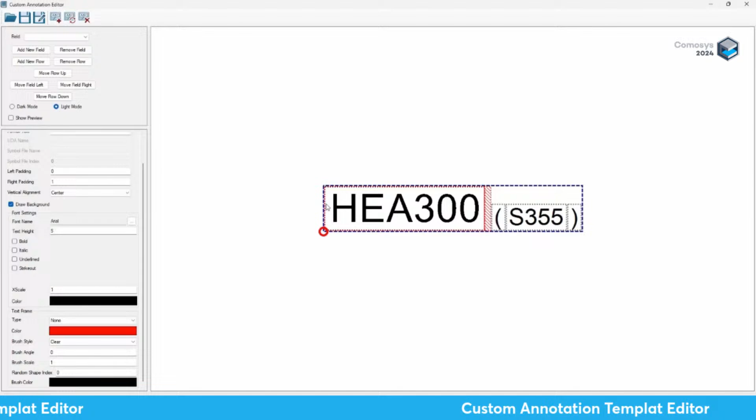Now you can see that if I select, for example, this first field and the first component of this line, you can see from the left-hand side, I showed you the left padding and the right padding, and the vertical alignments and the font heights, etc. But you can do other stuff as well, like you can change the color of the font to maybe something else. What you can do is put a rectangle around that particular component, or add a circle around it, or a rounding rectangle around something like this, which is rounded.

That's up to you. What you could also do is change the color of that rectangle. You could even have a brush style, like a cross, something like that. It's like a fill. Or maybe instead of a cross, if I make it solid, that basically fills the whole area up. So I've got certain options over here. Let me bring that back to clear, this to none, and this back to the black default.

So you can play around with each component, give it a different font size, a color, a background around it, etc. And this gives you a lot of flexibility. You can put padding on the left, padding on the right, and stuff like that.

But what's even more powerful is that this custom annotation doesn't need to be limited to one line. What you can also do is add another line to it.

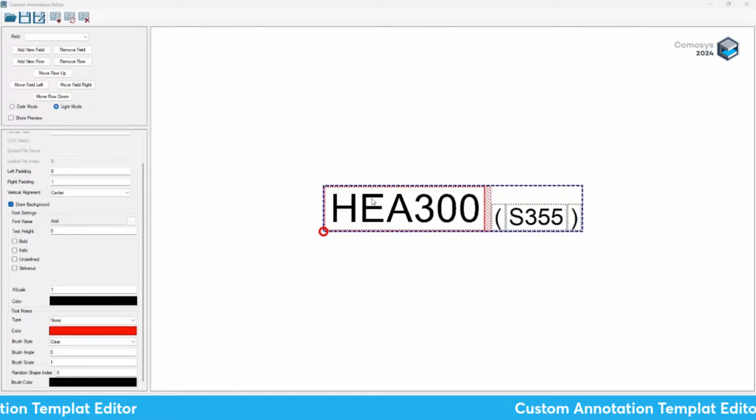So how do I add another row to this? What you can do is, while selecting any component, go to the left-hand side where it says add new field, remove field. You can say add new row, and it also has a remove row next to it. So let's just say add new row, and immediately a new row is added over there. And I can select that, and say move row down.

I need to press right now, as you can see, I have selected the component within that row. It's not very clear maybe on the video, but it's the component. To select the full row, I need to press escape, which takes me one level higher. When I'm at that level of the full row, I can move this row down or up wherever I want it, basically.

Now, one thing I can do is select this field in the component in the second line, and then press escape to select the entire line. I just press escape, and I select the entire line. This represents the full line now. And then I get this horizontal alignment. So I can press center, and now this whole thing, whatever is inside this entire line, will be centered along the entire annotation. I can press right if I want, it'll be like that, or I can bring it to the left once again.

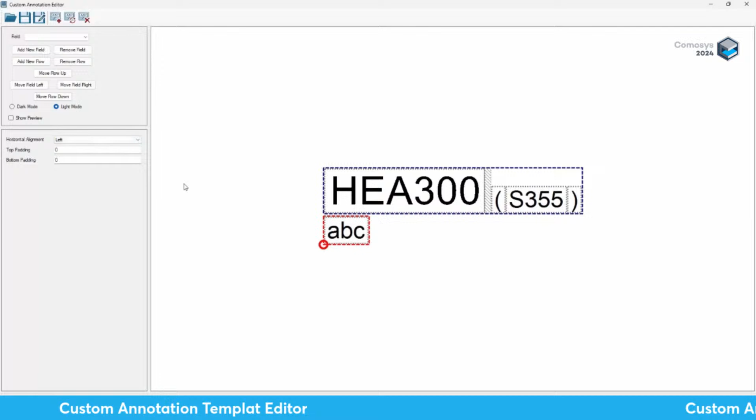If I go inside the field, then once again I have my left padding. I can put a padding of 4 spaces in the beginning, or a padding of 4 spacing at the right. It can be text, like I said. It can be other things besides text. If I want, I can choose another field.

For example, I can say give me the object, like part actual number. So if I want the actual number, it's going to give me an actual number like that. If I wanted to put a P behind that, I could have first added a text and then put the part actual number, with a space in between them. Basically, I could construct my part number in whatever way I wanted, unlike previously where you would be limited to whatever options Comosys was offering you.

And in this case, you can write a big P in the beginning, put a dash, put a small 27 in a different color. Basically, you can create your own entire annotation. Now, because there are 2 lines here, one thing we need to know is that up to 3 lines are supported in these custom annotations.

And in between the lines also, if you want, you can have spaces. So what you do is, this little thing represents that - if I select this one and press escape, it gives me a top padding and a bottom padding. If I give it a top padding of 3, I can put a space between the lines as well. And if I put a bottom padding of 2, it gives me a space after that line as well. And if I wanted, this is the anchor point.

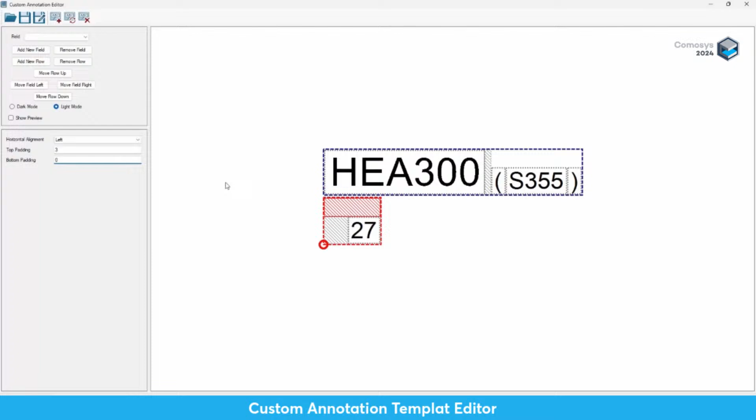This little round circle you're seeing is the anchor point. Sometimes these fields are used with text leaders in annotations, and you want the text leader to go between these 2 lines - a line in the middle, something written on top, then the text leader line, and then something at the bottom. In that case, you can create this little gap. But you also want this anchor to be over here in the middle, because that's where you want the line to pass from.

So if you want to take this anchor in the middle, what you do is come to this general area which represents the entire thing, and there's something called the anchor row index. If you change that to 1, it'll move. It could be 0, 1, or 2 depending on how many lines you have. 0 means the bottom, then 1, then 2 maximum. So if I give it a 1, the anchor point becomes the center, and we have a little gap in between them. So these little tricks allow you to create all sorts of combinations with your custom annotation.

Now, if you remember, I said you could even use your custom created symbols inside these custom annotations. We just talked about creating custom symbols, and you can create any symbol under the sun. You can create a library of symbols, and those symbols are stored in files, and within each file they have an index number.

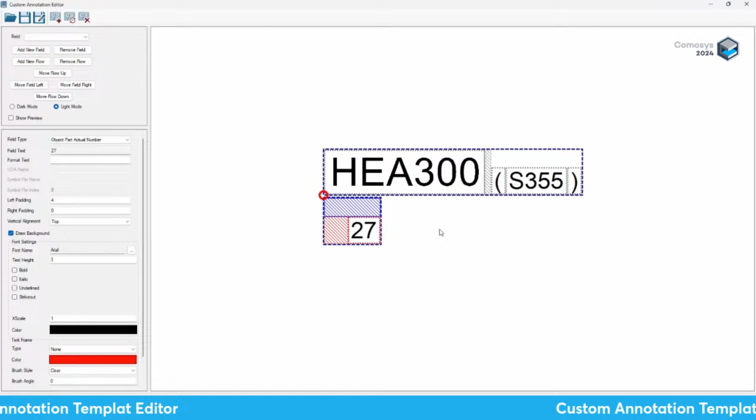So over here, let's say I've written the part position number, and I want to add a symbol after that, or before that, doesn't matter. So if I come over here and say add new field, you see it gives me a new field over there. If I select that, by default it's a text field.

But if I open this up and go all the way down, at the bottom there's something called a symbol. When I do that, it gives me the option of writing a symbol file name and the file index. Then whatever symbol resides at that index of that file will appear next to it. I can give it a size - more than whatever the size is, bigger or smaller.

As you can see, this custom annotation is extremely powerful. It allows me to create up to 3 lines. Each line can have as many components as I want. Each component can either be an intelligent field, a text, a symbol, or even a user-defined attribute.

So for example, instead of the symbol, if we come down over here, there's a user-defined attribute as well. In that case, you give the UDA name, which we discussed in the beginning. Whatever UDA name you give, if this object has that, it will create that when creating the annotation. So it's a very powerful new technique.

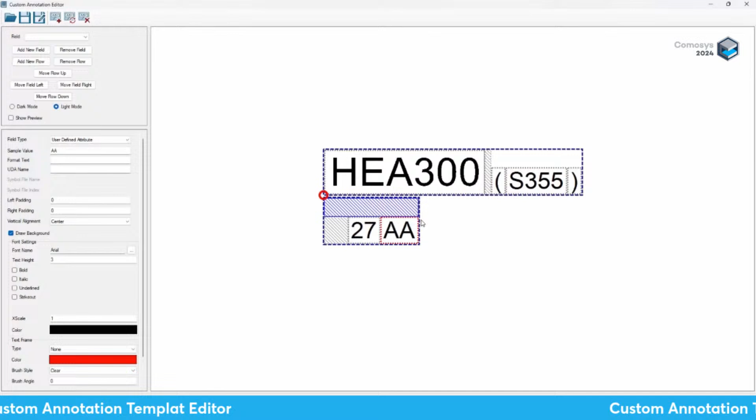You can create these totally customized annotations and save them away. When you save them away, they will appear in the annotations command. That's how you will use them. So the first thing you do is create these annotations, save them in this file. You can be happy with how they look.

You can change the font size and this and that. Once you're happy and they're exactly the way you want them to be, you save them in the file, and then you use them with your normal annotations. I'll show you how you do that. Now, the next question is, now that we've created these custom annotations, how do we actually use them?

You already know how to use the old annotations, which are the built-in or off-the-shelf annotations. They're over here, if you remember. You go to the annotation settings, where you select the built-in annotations - you press the same button again. This is what it used to look like, and this is what it still looks like. But now we have at the top built-in annotations, which is what we had before, and we also have custom annotations.

This is with regards to profiles. Obviously, there's the same thing with plates, bolts, solids, etc., and with rebars. So if you want to use the existing off-the-shelf ones, you can just drag them in - for example, say I want the profile name and the material name, etc. But if you don't want that, if you want to use the custom annotations, you clear them, leave these empty, and go to the custom annotations place.

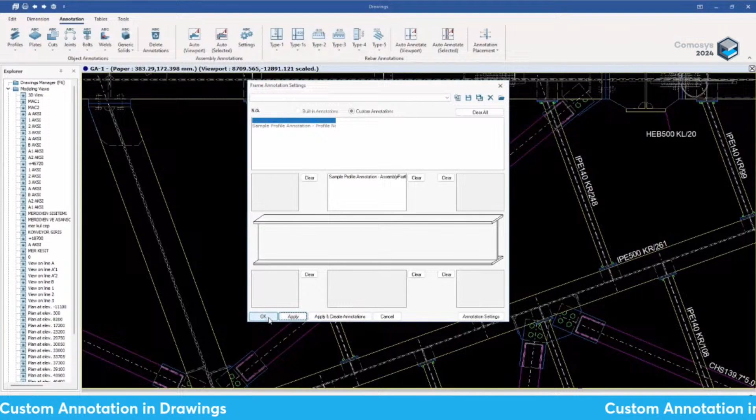This one already has the existing annotation. So I'm just going to select this frame, and say annotate the selected profiles. And now it has annotated it with the new one. This new one was basically what I just showed you.

It's custom based. You probably made a bracket, then wrote a P, then put a dividing sign, then the number, then the bracket again, and the second line material. You could have made different sizes, different colors, whatever you want.

So using this technique, that's all you do. You don't need to learn anything new. You just go to the custom annotations, choose the annotation you want, select your profiles, and apply the annotation. It's as simple as that.

Now you might be wondering that only two custom annotations appeared under the profiles annotations, whereas I had shown you a lot in the custom annotation editor. So I've put it back on so you can see them again. There's 1, 2, 3, 4, 5, 6, 7, 8, 9, 10, 11 custom annotations.

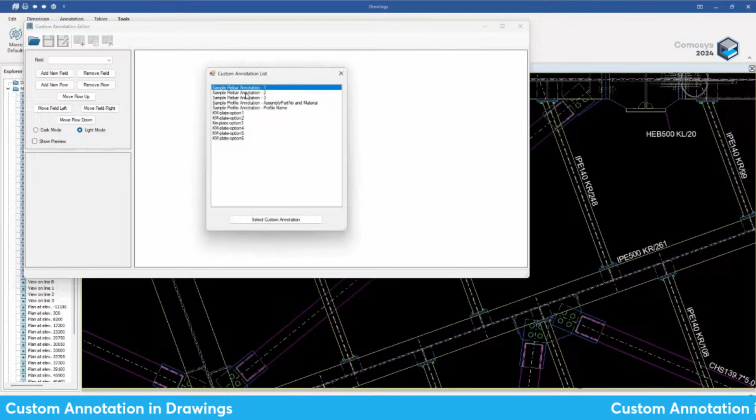The reason only two of them showed up over there was because only two of them had the category of profile, this one and this one. The first three were for rebars, and the last six are all for plates. We can see these KM plate option 1, plate option 2, 6 different types of annotations for plates.

If I close this editor and go to my annotation section again, I had shown you the profiles section over here - there were two custom annotations. But if I show you the plates section, in the custom annotation you can see the 6 custom annotations with the name starting with KM.

Similarly, if I go to the rebar annotations, over there we can find the 3 sample rebar custom annotations which we had developed.

So you can create as many custom annotations as you want. You just provide a category for them - whether they belong to profiles, plates, bolts, rebars, generic solids, etc. Once you're done, the program will automatically categorize them and they will appear under the proper headings.

Now the next thing I want to talk about is also very important, and has to do with our central theme this time, which is customizability. Now what I want to talk about is custom tables, custom table managers.

If you remember, one of the most important parts of such programs is the creation of drawings and reports - basically extracting information from the model. In the creation of drawings, you have material lists. It could be a part list, an assembly list, a bolt list, a weld list, a rebar report, or anything of that sort - or you could just take a material takeoff in a normal report.

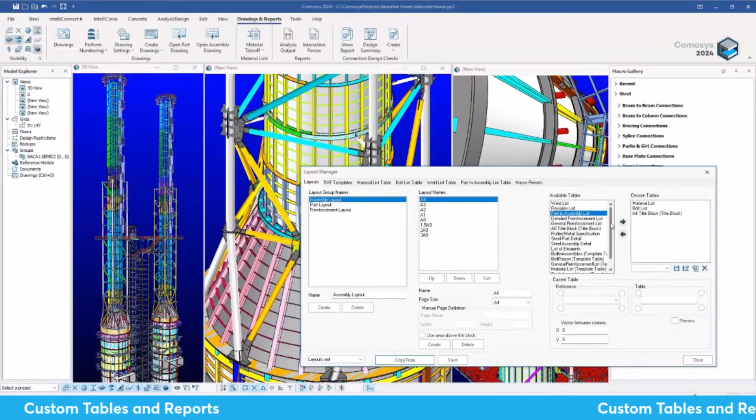But what we wanted to develop was something the user could use to create their own tables - where they would have all the fields available and could create and define their own tables. This allows them to work with any kind of client, in any kind of project where they have specific requirements for these tables and reports.

To do this, we have developed the template table editor and manager. To access it, go to the drawings and reports menu, and under it there's the material takeoff button. If you open that, towards the end there's the template table manager. This is the tool you'll use to create your own tables and reports, which you can then use in drawings or directly. If I click on this, it opens up the entire template editor.

Now I will give a brief summary of the capabilities of this new tool that we have developed.

The first thing I want to focus on is the table type, in the top left. This means what kind of objects will be included in the table. The options at the moment are plates and profiles. Typically, for assembly drawings and material lists, each assembly can have both plates and profiles inside them. Imagine a beam with lots of plates welded to it, and you're trying to create the material list of that assembly—that would contain both plates and profiles. It could also be a table which only contains profiles, only plates, or only bolts, like a bolt list, a bolt table, a weld table, or a rebar table. These are the options you have in this version, and you can choose according to what type of table you want to create.

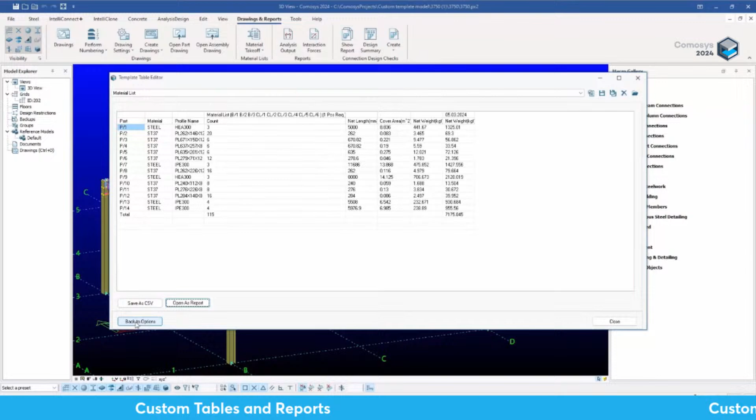Or, like I said, you've already saved it, and you can use it in the layout manager. I'll just now quickly show you that these tables, these custom templates which you've created, can also be used from the layout manager.

I'll just show you the results. For example, I have a few drawings. So if I open this drawing, you can see that this table has been created from the custom template editor. And here you have this user-defined field as well.

Just to give you an idea, it's very similar looking, one of the very commonly used tables, but this has not been used from the built-in off-the-shelf tables which we provide. You can basically create your own, use your own fonts, create your own column widths, and include whatever fields you want.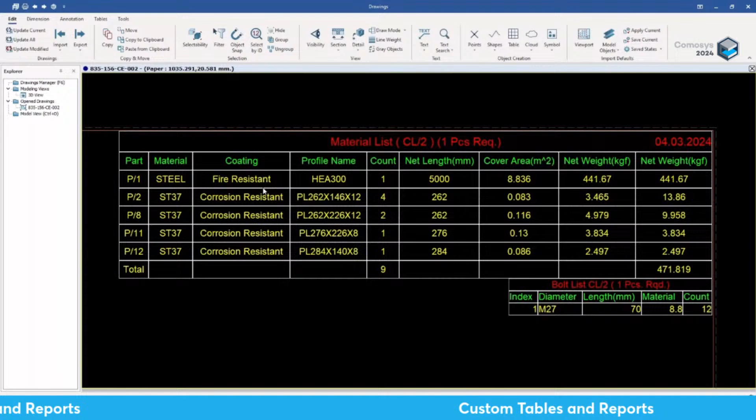You can even include shape codes and shape sketches if it's a rebar table. If it's a rebar material takeoff, you can use the shape sketches of the rebars, or use the user-defined attributes. This is a very powerful new development, which we hope will solve the issues of many of our clients who have very specific requirements according to their countries. By using this new table template editor, they'll be able to provide any kind of table their client requires of them.

Now let's talk about some new macros. I know everybody likes to talk about macros because they really make our job a lot easier. So I'm sure you'll be excited with the new macros we've developed for you.

I'll start with the steel detailing sector. And for the steel detailing sector this time around, we have 5 new macros for you. Yeah, that's not a small number. Usually with new versions, most programs will give like 1 extra macro or 2, but we've got 5 new macros for you.

I'm going to start with one very commonly used situation where it's very common to use rectangular hollow sections in trusses, for example. And since all the profiles are rectangular hollow sections, situations like this are very common, where they run into each other and need to be cut and welded to the main profile.

And maybe this one needs to be adjusted according to this one and that one, and they're basically fitted according to the main profiles. So for this situation, we already had a welded pipe macro, but it worked for pipes primarily.

But some of our customers wanted us to develop a welded box macro. So we've done that, and it's extremely simple to use. All you do is you select the main one, you select the secondaries in whatever order you want. After you've selected all of them, you just right click and that's it. Immediately, the cutting and the fitting and the welding and everything has been accomplished.

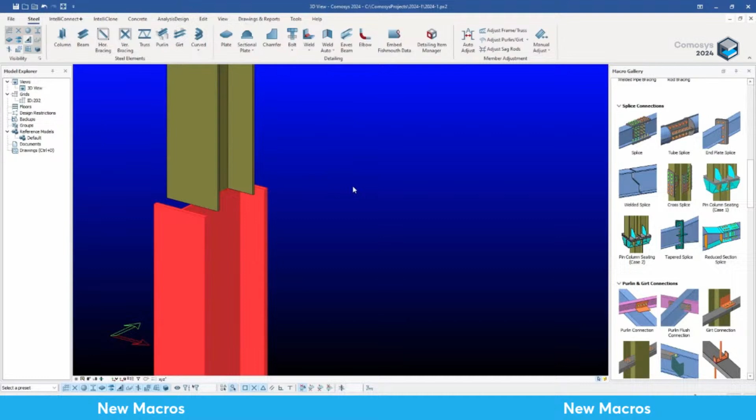And for what we've done in this version is that we have provided one such solution for you, which is very useful, very handy. All you need, it's called the reduced section splice, where the reduction is very significant. All you need to do is just click on it, select the bottom column, select the top column, and immediately you have this connection made for you.

I'll just go into it, pressing, as you know, M, then enter, and load my company defaults for these two profiles, HEA 500 to HEA 300. And immediately I get my connection.

Now, as you can see, what it has done is it's taken the first profile, extended it, and removed the flanges. Let me just show this one only. So it has taken the first profile, cut it out, cut out the web, removed the flanges completely. I'm going to turn it back on now.

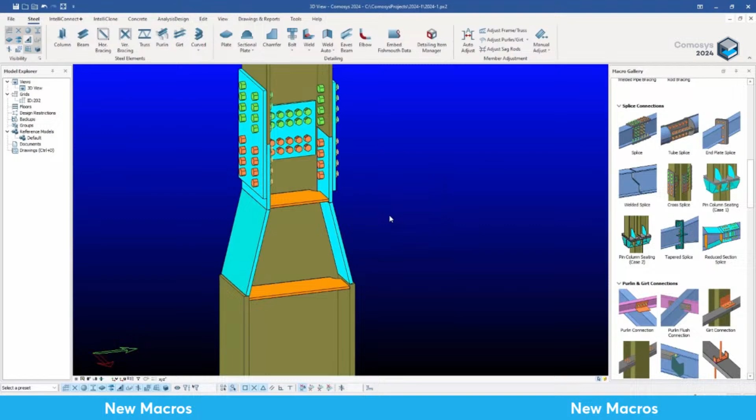And it's used extra plates on the side. So you have the continuation of the flanges in a different way. These are artificial flanges for the bottom column. And then it's continued that with other plates. And now at this point, it has created the normal splice between this one and the other one.

So this is an extremely useful, handy macro. Once again, like with all macros, you have the ability to enter all your numbers. You can save them away as your company presets, all information related to bolts, plates, and welds. With a few clicks, you can sort out this seemingly challenging situation.

Now let's move on to the third steel macro. Normally you would have the girts at the outer face of the column. That would be the normal practice, but sometimes the architectural requirements are such that you want the girts to be flush with the outer face of the column. In those cases, you need a slightly different type of connection where the girts just need to be pulled back and a plate needs to come out of the web of the column rather than from the outside.

So this is a different case, and normally, although it's very easy to do, everybody wants macros to do everything. So our customers requested that we have a flush girt connection, and it's extremely easy to use. You just select the column like the normal girt macro, select girt number 1, girt number 2, and that's it. Your connection is immediate. The girt is pulled back from both sides. The other girt is also pulled back, and your plate and connection is made with a few clicks of the mouse.

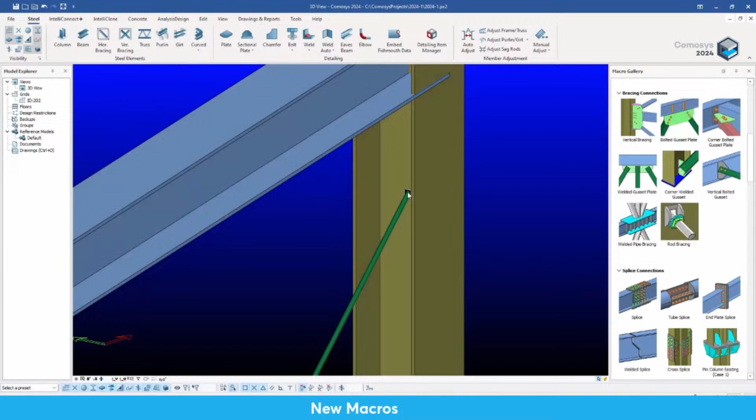I can go on the other side and show you what it looks like. I can zoom in and bring the standard company preset for this particular one.

There you go. And basically, as you can see, it places this standard off-the-shelf piece. It's called a hillside washer at that point, and allows the rod to just run through the column. And with the big washer behind it, it allows you to tighten it from the backside. And inside, you have details.

You can modify the parameters. You can change the hillside washer type. It basically reads from a file. You can have generic types and custom types. You can create your own side, whatever hillside washers you have available in your part of the world. And then according to that file, you will then choose the particular washer.

So it's a very convenient connection. It just puts this little piece, which you buy off the shelf, and it takes the rod right through it and right through the column. And then from the other side, it puts this washer, and it allows you control over these parameters.

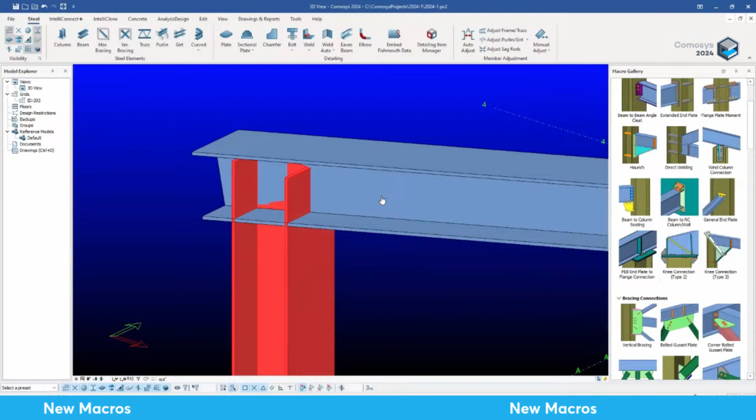Finally, for the steel macros, I want to take you to the knee connection type 3. We already had two type 1 and type 2 knee connection macros, but this is requested by some of our customers as well, for situations where the profile is coming in at an incline and you want this sort of a connection. It's extremely easy to use. Just select the column, select the beam, and you have your basic knee type connection created for you.

You can go inside, you can change the parameters as always. I've just set my parameters to not waste time, basically, to create my custom connection. You have options, for example, different types of haunch styles. So you can have parallel haunches, which does something like this.

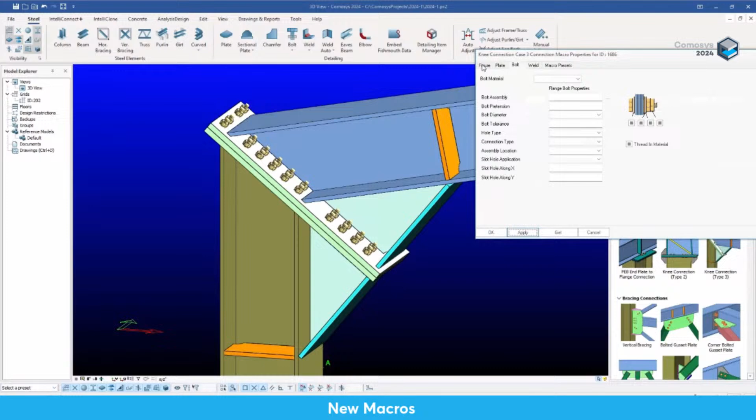Let me just show you. So you basically look at this one is parallel to the column, and this one is parallel to the beam. What else do you have? You can have the same thing at a particular angle as well, like that, or you can have the default, which is like this. So you have things to play with. You have complete control over the bolts, over the plates, over the dimensions, etc. And once again, a handy macro to use, and we hope you will like it.

Now, I want to show you a very important new feature. This feature has been requested for some time now, and we were working on it. And this is the first time it is being released. It's called the bent plate. The bent plate is different from the folded plate in the sense that the folded plate is only folded in one continuous direction, whereas the bent plate, on the other hand, can be folded in different directions by basically joining or opening up pieces of flat plates.

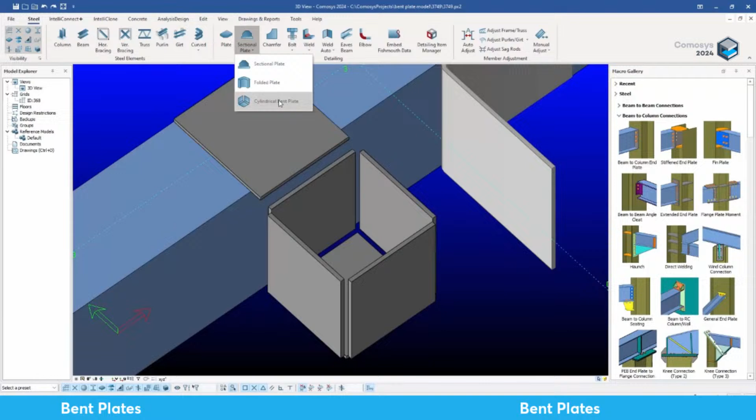The way to use this command is very simple. You just create independent plates first, which will then be joined to each other. So what you see on the screen is six plates. And what you do is you simply use the new command, under the sectional plate menu, under the plate menu. It's called the cylindrical bent plate command. And what it does is it allows you to select two plates, or one bent plate and one plate. When you select them, it automatically joins them at a common intersection. If there is more than one common intersection, then it will ask you to choose which particular one you want to use.

So let's see how this works. What you do is you go here, use the cylindrical bent plate command and click on it. And then it allows you to choose either two plates or one existing bent plate and another plate. So I'm going to choose this plate and this plate. And immediately it joins them together. And now this is no longer a normal plate, but this is a bent plate.

I can continue by selecting this bent plate and this plate, and it joins those two together as well. You can see it's joined them together. I can then continue to join this whole new bent plate and this last piece, this one and this one. And now, because it sees more than one possibility to connect, one common edge is over here and one over here, so it asks me to choose which one I want. So I choose this one, and when I do that, that one is connected.

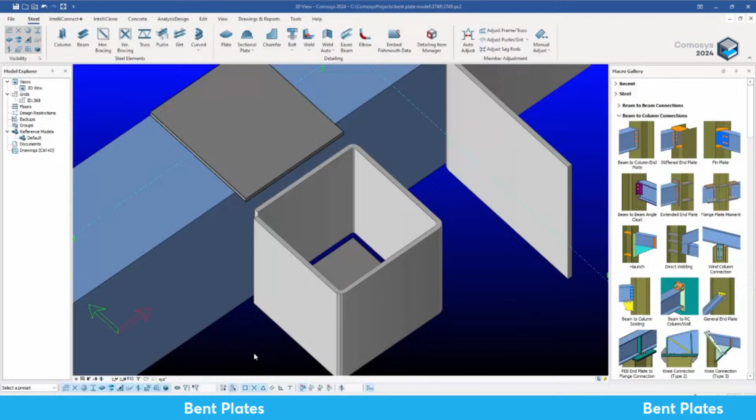Now, up till now, this could have been done with a normal folded plate as well. But now I'm going to connect this plate to this existing plate, and this will make it a true bent plate. Let's look at it from here. Go to my command, my cylindrical bent plate, choose the existing bent plate, and choose the new plate. It gives me two options at this point. I want to choose this one, the direct connecting one. You can see that it has now connected this folded piece to this new plate over there.

Now for the final one, there's one lying at the bottom as well. I can go and choose the command again and say connect this one to this one. It gives me four options this time because all four are touching or can theoretically touch. So I choose this one and immediately I get this very complicated folded plate.

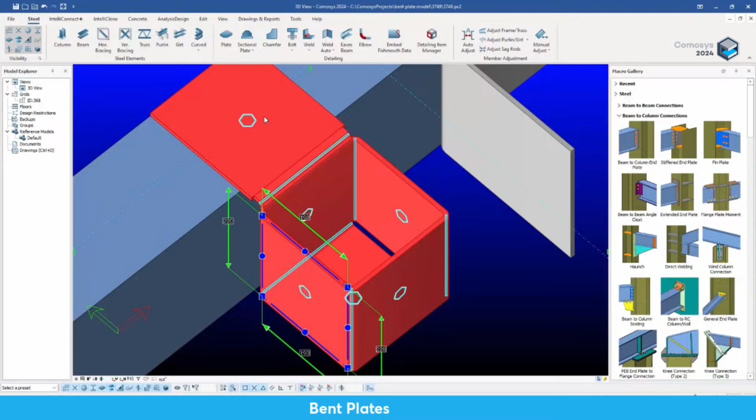Now, even after you have finished creating this bent plate, when you select it, you see that there are many handles which appear on the screen. These include little polygons which you see in the middle of each plate that was used. If you select these roundish polygons, the particular plate used for that connection is now highlighted, and its corner points are highlighted.

And if you want, you can modify: you can add new points, midpoints, new chamfer points, and move the points if possible, like for example in the case of this one. If I select again and select this one, then I can, for example, move this point somewhere else, if that could be a requirement. So this is the first handle in the middle of every plate which was used.

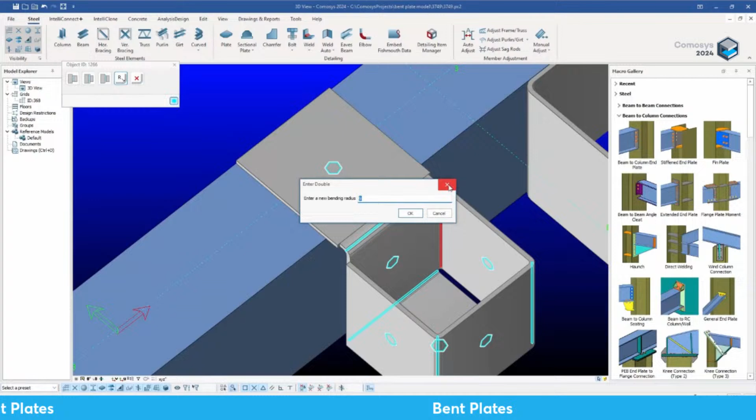The second handle are these lines which you see. These lines are the common edges where the plates were bent. If you double click on these lines, you have a new feature which allows you to bend according to the short edge. So the two common edges might not be the same length, so you can connect the shorter edge, or the longer edge, or make a tapered connection. You can modify the radius of the connection, the radius of the turn, or you could just remove that entire edge altogether, and it's like you never connected those two.

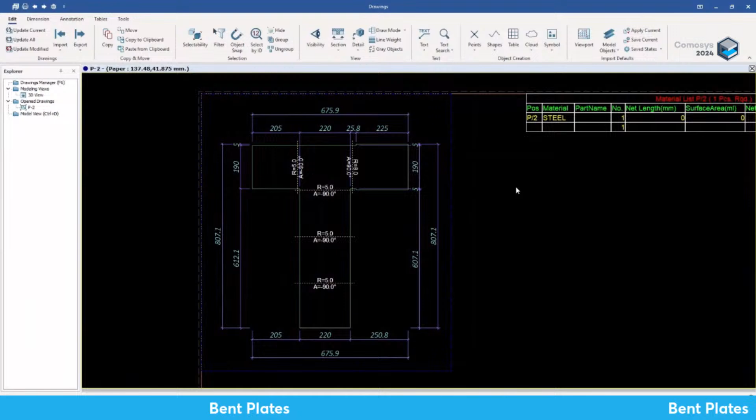So all these editing features really make the creation of these bent plates very easy and very simple. And obviously, the whole idea of 3D modeling is to produce 2D drawings. As you can see on the screen, all we need to do is select that element, right click, and say create the part drawing, and it will create the unfolded drawing of that folded plate, showing the angles of where it's been folded, the radii, and the lines where the folding needs to take place, etc., along with the material list and everything. So this new feature has really made the drawing production and modeling of bent plates extremely easy, and we really hope you will enjoy it and use it in your various projects.

And now for a little surprise. Modeling is not only about steel and concrete. There is mechanical and electrical as well, and these disciplines also need to be modeled if you want to extract proper drawings from our models.

What we have done is, this is the beginning of our electrical module, which you're seeing on the screen. It's going to be a very powerful one, for modeling the raceways and cable trays and the cables themselves, and the routing of the cables, and the modeling of consumers and the production of consumer lists, etc., directly from the model. So it's going to be a very powerful module.

You can see on the right-hand side that we have commands for creating cable trays, vertical elbows, 90-degree elbows, specialized elbows, T connections, downward connections, cross connections—basically anything you will need to model your cable trays—and then to modify them by breaking them, joining them, or mitering them, etc.

And then we have consumer objects to create panels and consumers and all the electrical consumers which you might have, lighting fixtures, etc. And then you have even some macros for creating supports for these cable trays, because they need to be connected to the steel structure or the concrete structure. And you have commands for cable routing as well. You can produce cable lists directly from the program.

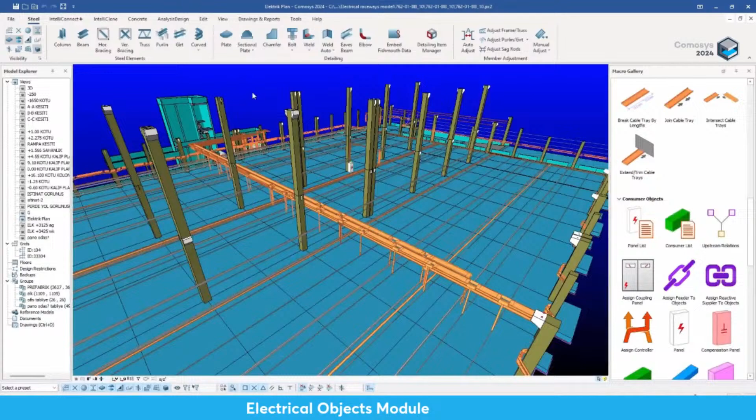We have now come to the end of my presentation. I hope you liked what you saw. And to be honest, I could not show you many comparatively minor but extremely useful features because of time constraints. These include

improvements in the API, which now allows even more things which can be done with it. I didn't talk about better Grasshopper integration, which includes the ability to create cuts and welds, as well as solids and rebars directly from within Grasshopper. I didn't mention minor improvements in working with our databases.

I didn't mention IFC improvements. I didn't talk about many built-in features, many built-in tables for the Russian market. I didn't talk about dozens of small improvements in capabilities of the various commands on the drawing side. I didn't even mention the new ability to put sketches inside table cells, or the extremely useful additions to the project preferences file. And finally, I also didn't mention the new text-based documentation of Comosys, which will now be available with this release.